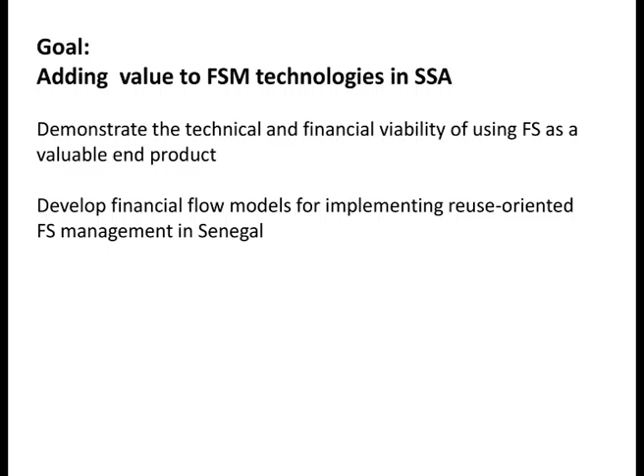To give you some specific context about Dakar: there's 2.5 million residents. 65% of the population has access to adequate sanitation, and 25% is served by sewer systems. There are 2 sewer systems in Dakar - one goes to a wastewater treatment plant at Cambérène with activated sludge, and the other goes directly into the ocean.

40% of the population is served by on-site technologies, mainly septic tanks. A large number of on-site sanitation systems have been built because they're relatively inexpensive to set up compared to the sewer. But in reality, at the household level, adequate and appropriate management is actually more expensive than the sewer due to the cost of emptying.

The sewer tax is based on drinking water consumption, so everybody is paying for the sewer, but people served by on-site systems are in addition paying to maintain their systems. So they're basically paying twice for sanitation.

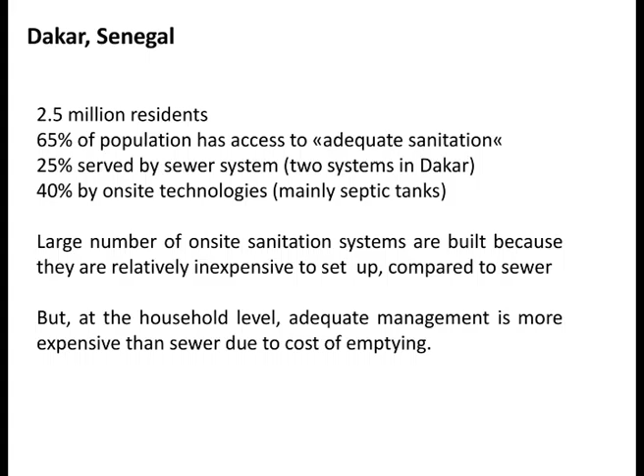On-site technologies without adequate money for proper management obviously leads to self-management. The picture on the right shows a household level user who just dug a hole in the street and emptied their system there. The result is, of course, environmental pollution, increased human health risk, and groundwater contamination.

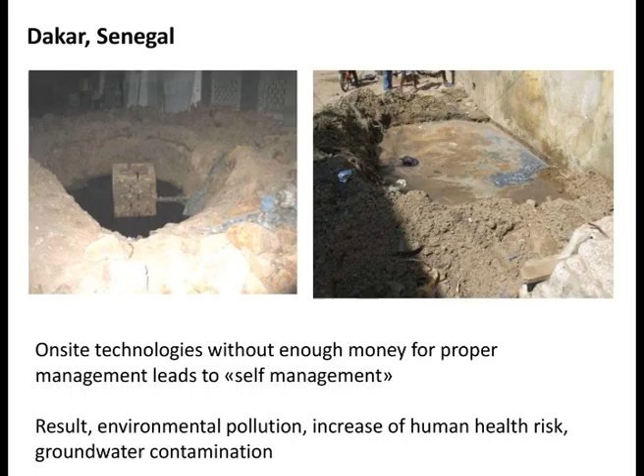Here's a neighborhood in Senegal - I put a question mark because I wasn't able to fact check this number with Se-Dun, and I don't want to state it as fact until I do, because it seems quite large. In this neighborhood in Dakar, on-site systems are estimated to currently be contributing 15,000 cubic meters per day to groundwater recharge, the same quantity of water that was pumped from groundwater in the 1970s to supply Dakar with all of their drinking water. Anyway, I'm not certain about the number, we'll check that, but the point is it's very significant.

These pictures show: the one on the left shows the construction of a septic tank, built above ground because of the high water table. The picture on the right shows the outlet pipe at the top - it's just draining from the top of the tank directly into the street. There's no leach pad or anything.

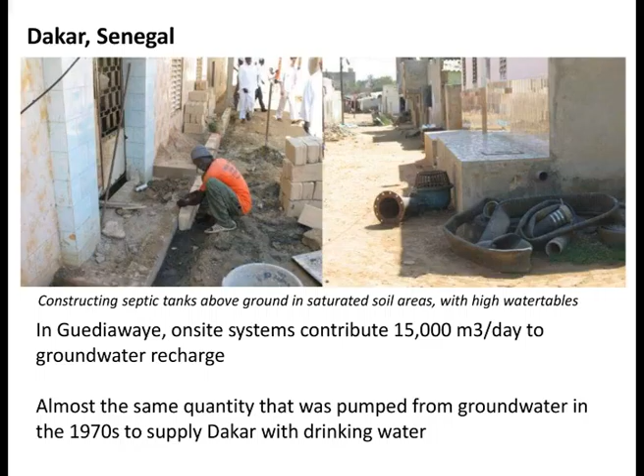Okay, so what's the topic today?

We're going to present briefly some results from each of the 3 topics that the students are working on. First, the sustainable sanitation fee structures, then the planted drying beds, and then unplanted drying beds.

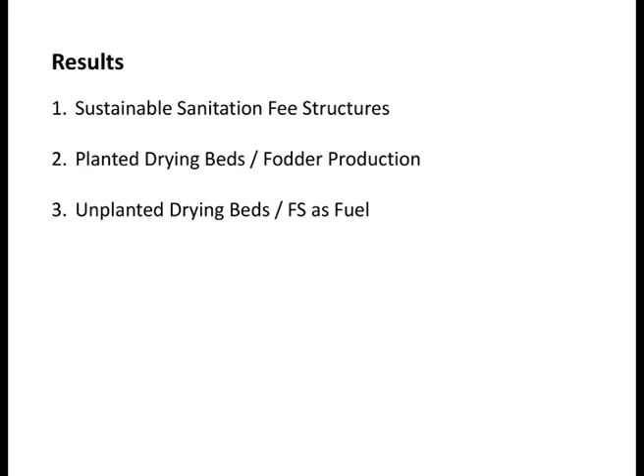In terms of the first topic, sustainable sanitation fee structures, this is a paper that recently came out, and it actually predated John Biron's PhD work, and he's now continuing on from here. This was comparing the capital and operating costs of fecal sludge management versus sewer-based systems.

Dakar was provided a unique opportunity to make this analysis because these systems exist side by side in the same place. If you tried to compare these two totally different types of systems in two different cities, there's just too many variables to compare.

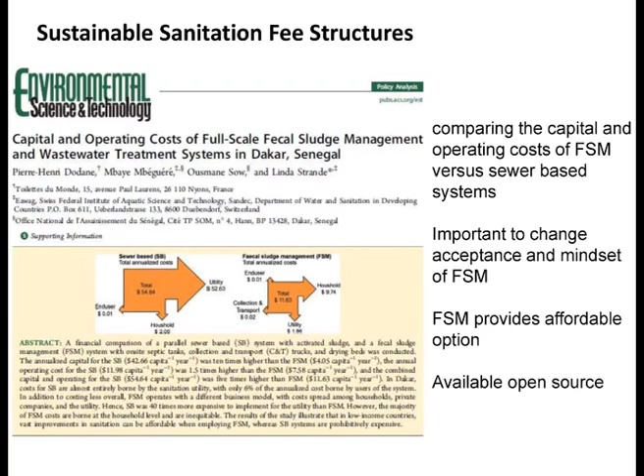From here now, John Biron has conducted studies in Ghana, in Burkina Faso, and Senegal, and he's just completed his field work and is now starting to analyze his data, and hopefully will soon come out with some publications.

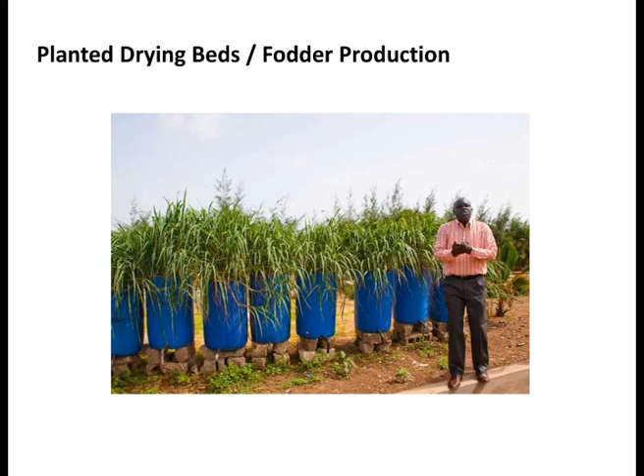In Europe, several studies have been conducted. The technology is reasonably well established and results are available, so we know sludge loading rates depending on climate, loading frequencies depending on weather conditions and climate, how to handle different types of sludge, and how to use different types of plants. But in sub-Saharan Africa, and specifically using fecal sludge, the technology is still in the experimental stage.

Really most of the research has just been done by Ives Kengne in Cameroon. So the only results to date are that we use sludge loading rates of about 100 to 200 kilograms per square meter per year, and Yves did his work with Echinochloa.

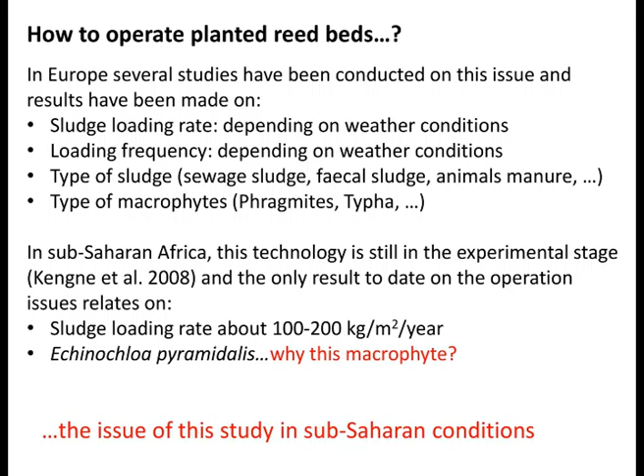So Sanko wanted to ask, how can we make these results more relevant to the sub-Saharan context and have reliable information? This is the experimental setup for his PhD, where he's looking at treatment performances and humification processes. He had 3 different studies that each ran for 6 months.

The first was looking at loading frequency. The rate was kept the same, but the beds were fed either once a week, twice a week, or 3 times a week. Then he tried 3 different types of plants, and also varied the type of sludge coming in, either raw fecal sludge directly from the emptying trucks, or thickened sludge following primary settling, or sewage sludge, just so we could compare the results.

Today we're just talking about the first paper, which he's working on writing up now, which is loading frequency.

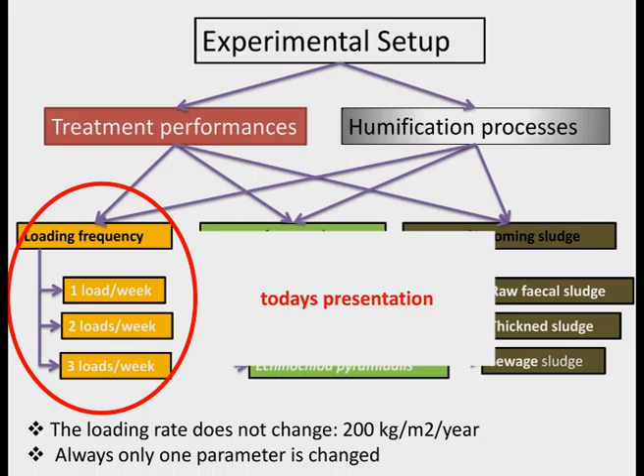This was how he set up his system. You saw the pictures of the barrels in the slide a couple back that I pointed out. He planted the plants, he filled the barrels with coarse gravel, medium, fine gravel, and sand, just like a drying bed.

Then he planted the plants and got them acclimatized to the fecal sludge, starting by watering first with tap water, and then gradually stronger and stronger and higher loading rates of fecal sludge till he got them acclimated. If you've worked with planted drying beds, you know this startup period is very important.

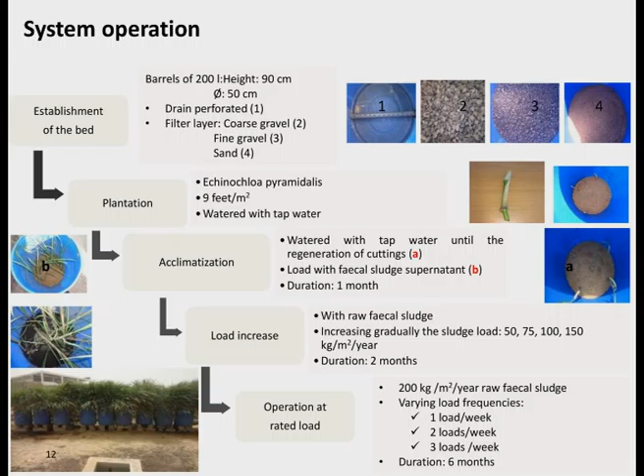So now here are some of his results. He found that the density and stem diameter of the plants increased with the loading frequency.

After harvesting, the density of the plants was higher, but the plant stems were actually thinner, just because when you cut them all down and they're growing back rapidly, they're smaller. Also, loading once a week resulted in reduced plant growth due to wilting.

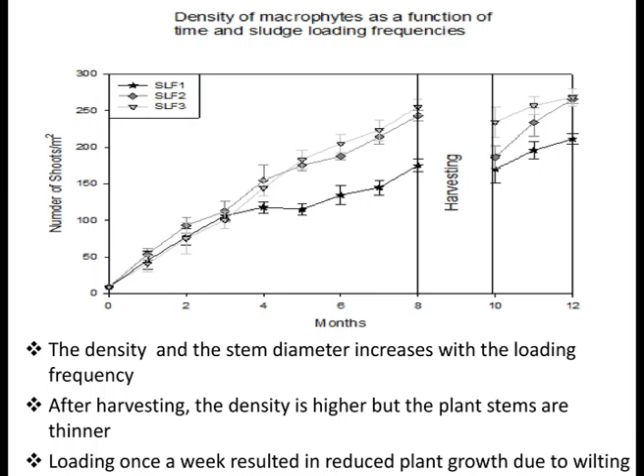This slide is a bit confusing. It's a lot of data presented all at once, but what you see in the black line is the actual raw sludge that's coming into the system. It's extremely variable because it's coming from these different emptying trucks, but is also representative of reality in Dakar.

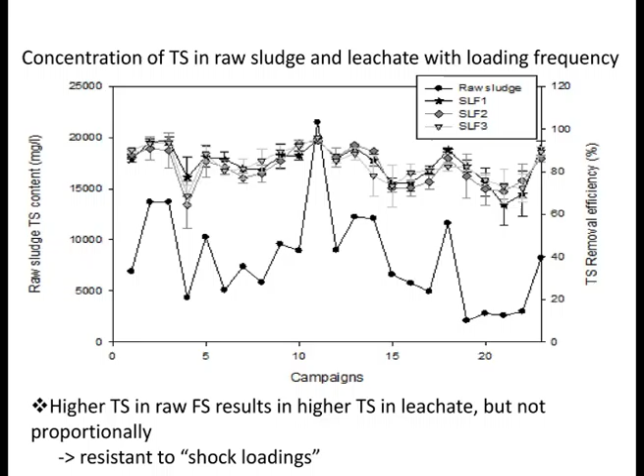What you see in the top lines are the total solids concentration in the leachate coming out of the bed. So the total solids in the leachate varied with the load that was put on, but not proportionately. So we saw that the beds were relatively resistant to shock loadings.

These are some of the conclusions altogether: increasing the loading frequency reduced the volume of sludge applied at one time, and he found that that also resulted in less clogging, so there was less ponding of water on the surface of the beds. As we said, the increased loading frequency also enhanced plant growth.

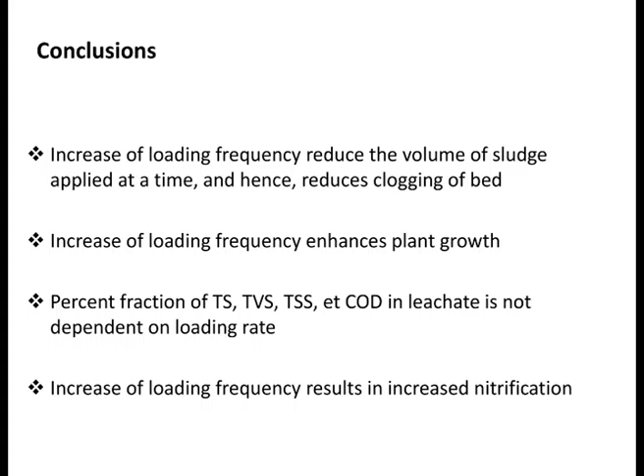The removal rates, or what's present in the leachate, was not directly proportional to the loading rate. Also, increased loading frequency resulted in increased nitrification. So the conclusion is that for fodder production, loading 3 times a week is much better than 1 to 2 times a week. This is from the second student.

This is a study he just conducted, identifying local indigenous plants that have never been used before in drying beds, to see if they could be used for profitable end use. The first thing he did, which was a pretty good PhD topic, was travel around Senegal looking for plants that grew in promising areas that could also grow in treatment wetlands.

From there, he conducted surveys with people, a socioeconomic evaluation, to find out if the different plants had beneficial, profitable end uses. We asked people about crafts, since they use the plants a lot for weaving mats and fences, food for livestock, and also treated sludge production for agricultural use.

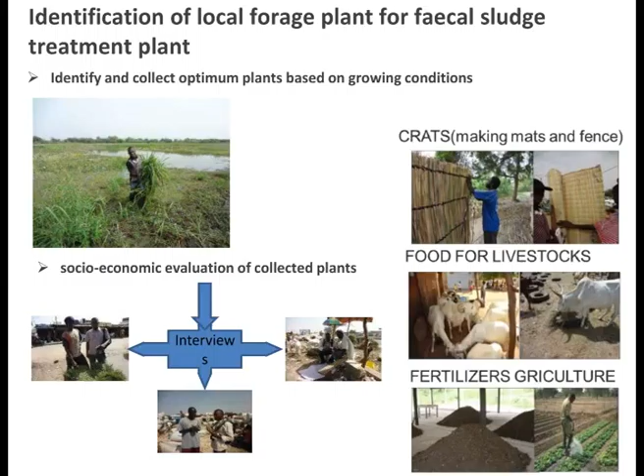Based on this, he identified 7 species. I'm just going to run through them quickly. These are from some pot trials he did later. It's a variety of different plants.

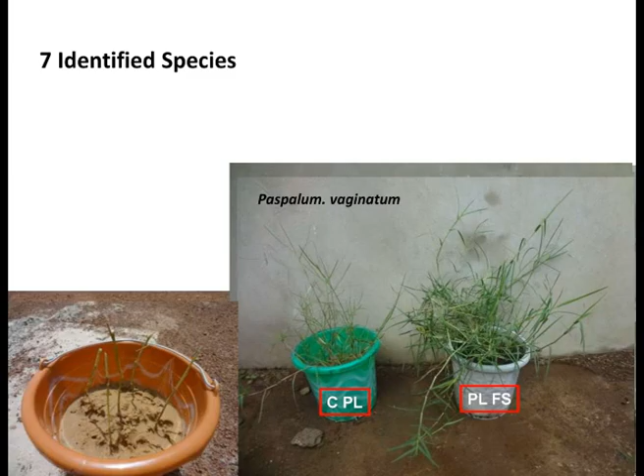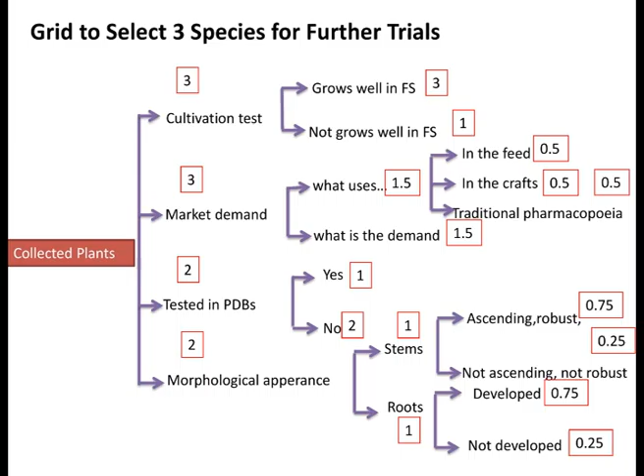He put together an evaluation matrix because we only had enough resources for him to test the optimal 3 plants. Based on these cultivation tests, he decided to do the market demand analysis, checking whether the plants had been tested in planted drying beds before, since he wanted to research something not done before, and then their overall morphological appearance and how that would affect their end use.

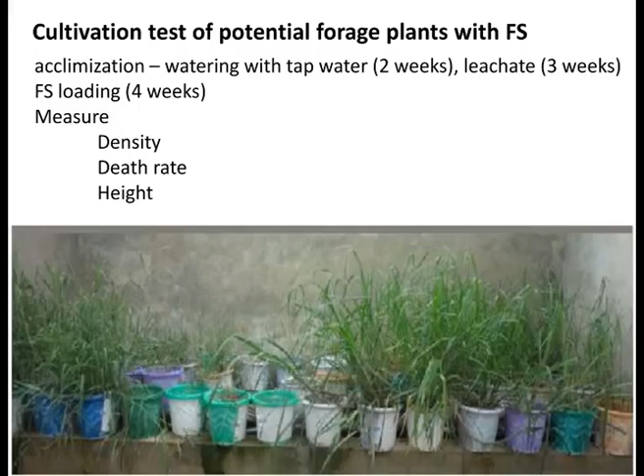This was the initial pot study, where he planted all 7 types of plants and acclimatized them for 2 weeks with water, 3 weeks with leachate, and then fed them for 4 weeks with fecal sludge, measuring general characteristics of density, death rate, and height.

What he found was that 5 of the plants grew really well, and only 2 did not, so I'm not going to go through the results in more detail than that.

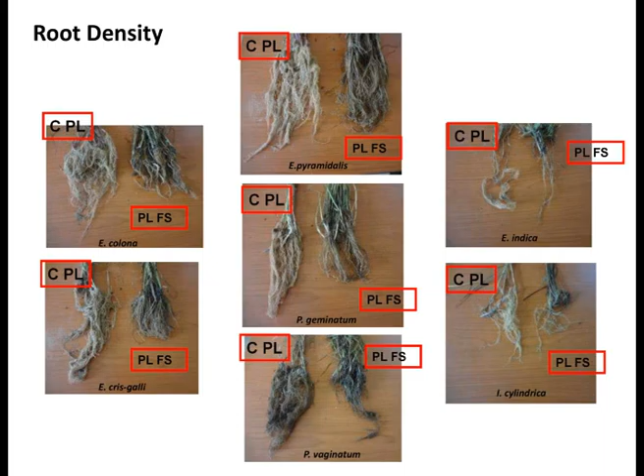This is just qualitative data on root density. The plants growing with fecal sludge have smaller roots because they don't have to grow as much to look for nutrients or water.

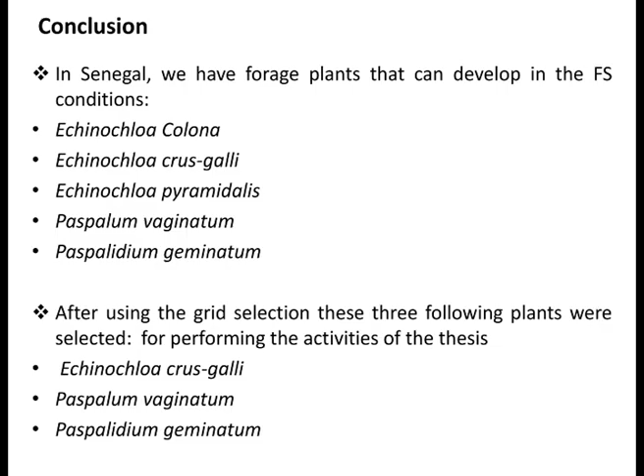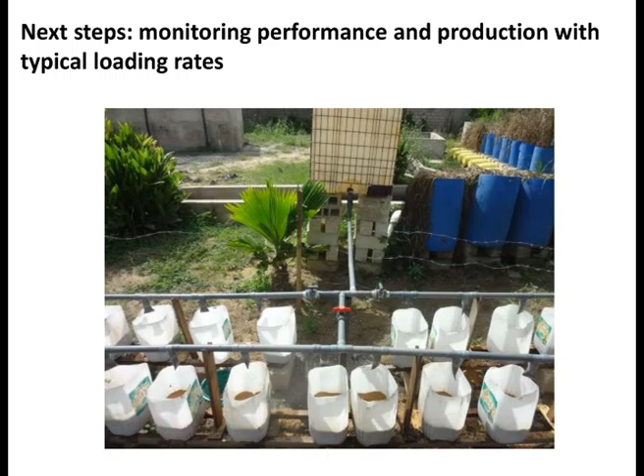In conclusion, he found that 5 plants grew well with the fecal sludge and 2 just suffered and died. Based on his grid selection, he's now doing further analysis on the 3 optimum plants, and will do follow-up small-scale studies using actual loading rates before moving to full-scale implementation.

This is the final study, where a student is looking at greenhouses and passive ventilation to increase drying of fecal sludge so that it could be used as combustion for industrial fuel.

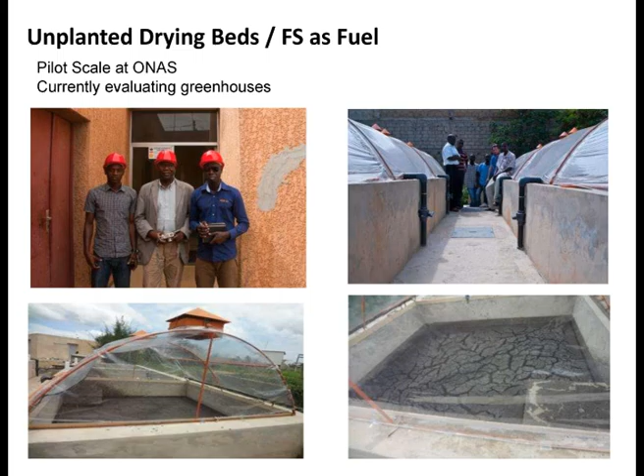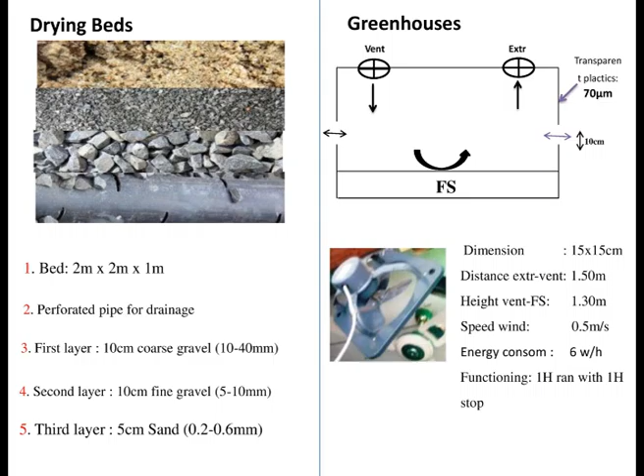The industry we're working with has stated that they need the sludge to be 90% dryness for them to take it. We have drying beds that are 2 meters by 2 meters, and he set them up with greenhouses that have 2 chimneys on top. These are the analytical methods he looked at.

The results found that the first test with passive ventilation, using just the chimney, actually increased the amount of moisture in the sludge because it trapped the humidity. So this was not a good result.

The next thing he did was open the area around the bottom to increase ventilation, which resulted in no net benefit, but was better than the previous setup.

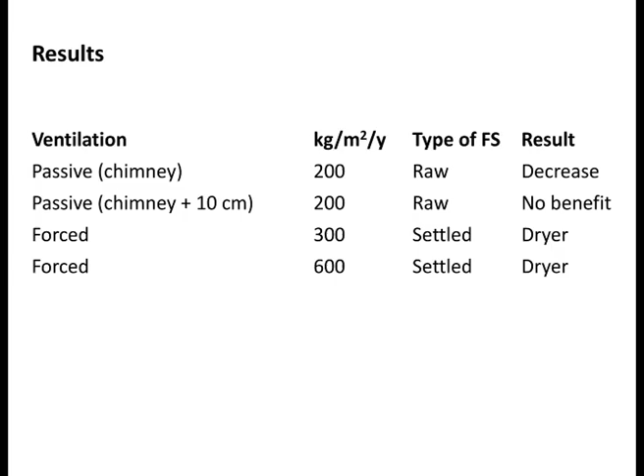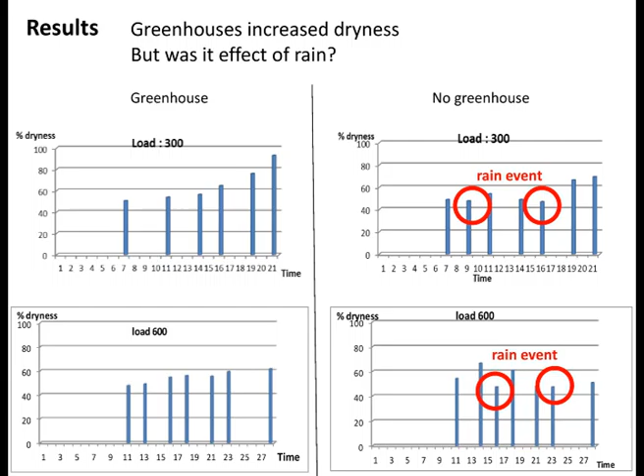Then he put in active ventilation, with one fan extracting air and one bringing in fresh dry air, and found increased performance. But it also rained during his study, so now the question is whether the increased dryness was an effect of the greenhouse, or simply because the greenhouse acted like an umbrella, keeping the sludge dry from the rain.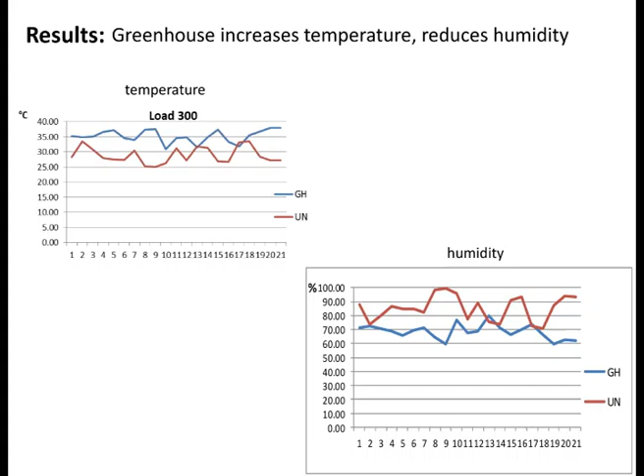So he's now replicating this study. This also showed that the temperature was higher in the greenhouses and the humidity was lower, so it seems like there is good potential there. But he's just doing some final tests now.